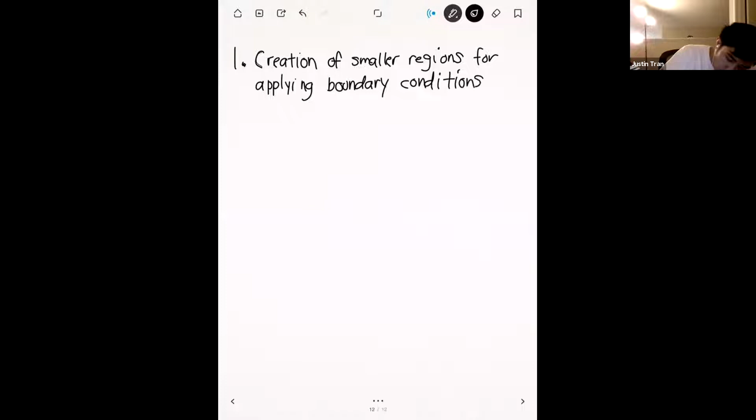Okay, so that's the first one. The second one that we're going to learn is how to split a model itself. I was asked this by someone who's doing the bearing housing one. One way you can approach this is to take advantage of the symmetry in the system, cut the model down the middle, take out one side, and then just focus on the other side.

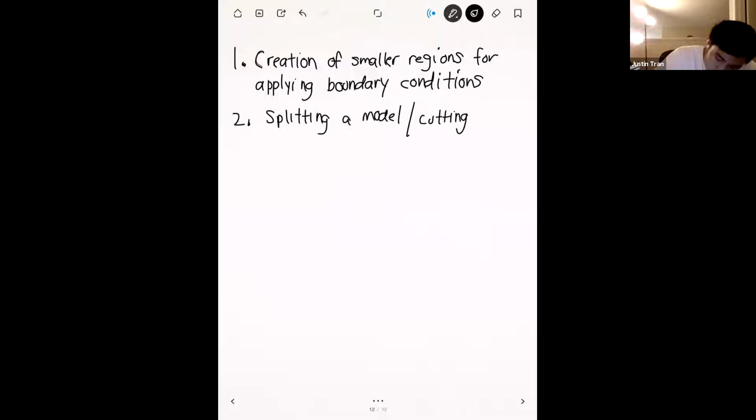And the third feature that we're going to go over today is how to do section planes within ANSYS Mechanical.

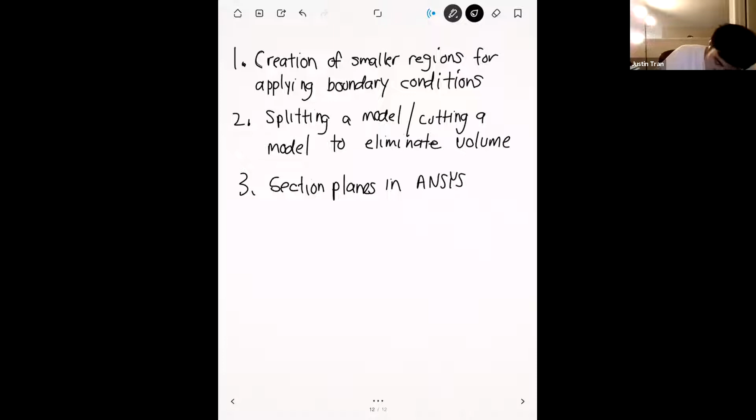So in case you're doing something like the globe valve, and you want to look on the interior of the model, you want to do this with the section cut, so you basically want to make a cut just so that you can view it on the inside. There's a very quick and easy way that you can do that within ANSYS as well.

Okay, with that, let me go ahead and share my laptop screen. I'm going to do all of these with the globe valve, just because that's the one I was kind of playing around with. But you can of course do this for any other geometry as well.

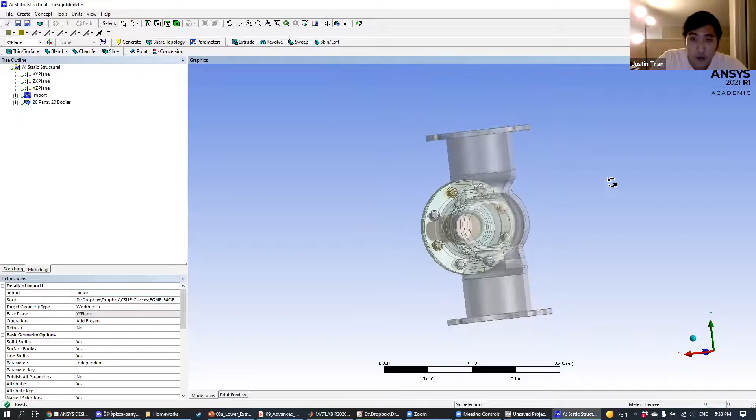The first thing we're going to do is point number one, which is the creation of a smaller surface for applying forces. The situation is kind of like this.

Let's say that you have this surface right here - actually, maybe this one is probably easier. When you click on the surface, you select the entire cylindrical part at the same time. For a lot of cases, that's fine. But let's say you want to model a case where you have some kind of impact that hits it from the outside, and you want to apply the boundary condition in a tiny area like this, and not affect the entire rest of the model.

The way that you have to do that is you basically have to create another sketch to define that region, and then you're going to project that region onto the model. Let me see - okay, that's a little better, just so now the whole thing isn't transparent. And so you have to do this in a few different steps.

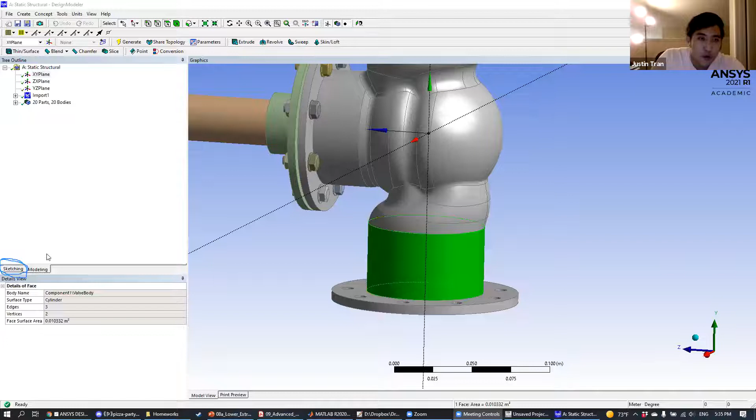The first thing you have to do is draw your sketch on the plane that you want. There's a few ways you can do this. One way is you can simply click on the surface, and then click on sketching down here. By highlighting the surface and clicking sketching, ANSYS is going to create a sketching plane for you that's tangent to this surface. So if you can see from here, after I click sketching, it created a new sketching plane that's tangent to this surface.

If you go back into modeling here, you can see we have plane number 4, and this plane number 4 is coincident onto the surface right here. So that's one way you can create a sketching plane - simply click on the surface of interest and then click on sketching.

But if you want to be a little bit more precise in terms of what plane you want, then you can go ahead and create another plane. If you go to create right here, you can click on new plane, and you can see we've created a new plane right here.

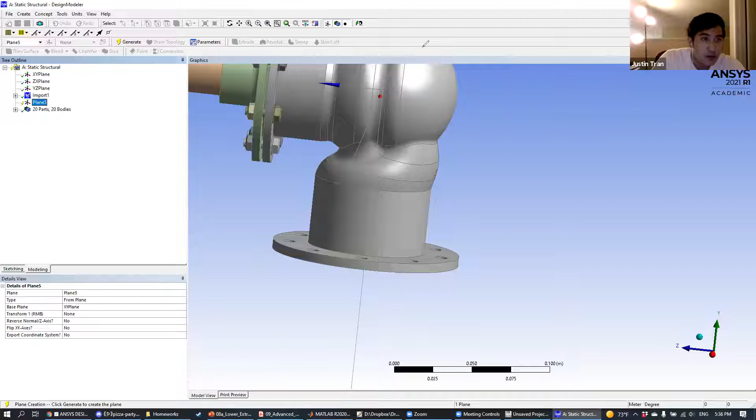From this new plane, you can define the direction for the plane. One way you can do this is say that this plane is going to be parallel to one of the base planes here. Just for the sake of this tutorial, we're going to make a plane that's parallel to the YZ plane. So I'm going to highlight the YZ plane right here and then click apply, and now this new plane is going to be parallel to that one.

Right now it's actually exactly the same as the YZ plane. But let's say that we want to offset it by a certain amount. What you can do is go to transform 1 right here. Transform 1 is going to let you either move the plane around or rotate it. Let's say that we want to offset it in the X direction. This is going to let us offset the plane in the X direction by an amount

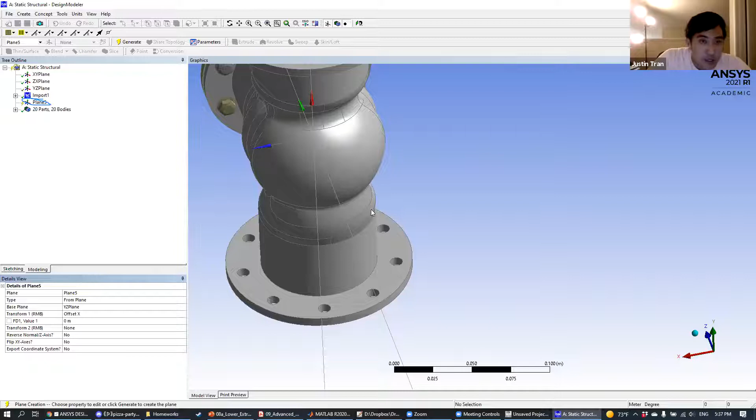that we specify. Let's say we want to offset this by 0.05 meters. Oh, I'm sorry, the X direction is that way. So actually, we want to offset this in Z. It's a little bit confusing because the planes have their own coordinate system here, which is different than the global coordinate system. So you kind of have to look at the colors of the arrows.

In this particular case, I want to move the plane out of plane up over here, so that we can get it onto the surface of the cylindrical part. So I'm going to offset it in Z instead. You can see that now this plane is no longer at the center of this part. It's now offset to the side. If we want to get this closer, we can do 0.04, and you can see now that we're closer onto the surface.

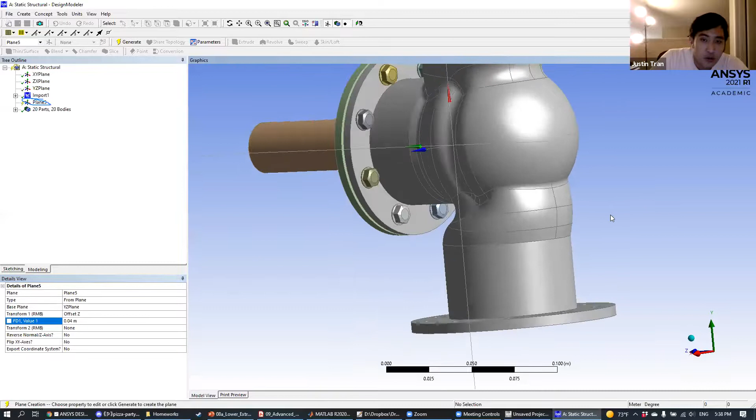Your new plane doesn't have to be touching the surface itself, although it makes your projection look a little bit cleaner, so the closer you can get to the surface, the better. But just to illustrate that you don't have to have this plane perfectly connected to the surface, I'm going to leave this plane a little bit offset. Can you see from your computer screens how this plane right here is offset from this one?

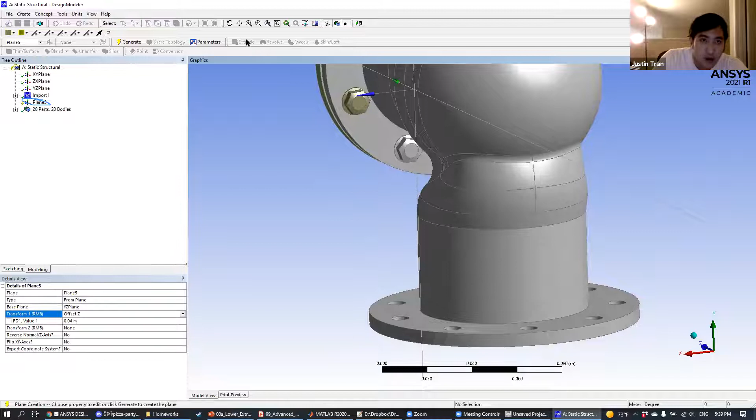Here's the centroid of this plane, and I want to project a little circle onto this surface right here. You can see that the plane I created was a little bit offset from that. Now that we've created this new plane, let's go ahead and sketch in it. You're going to go to the tree outline, click on the new plane that you just created, and then click on sketch.

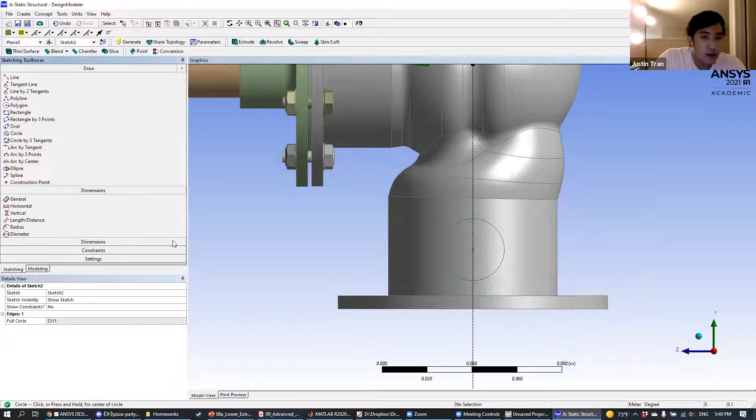Now we can go ahead and create a sketch here. Let me center this up so I'm looking right at the plane. I'm going to draw a circle on here, just like this. Then we can go ahead and dimension this circle. Let's say that we want a diameter of 0.025 meters. Then let's offset it from the bottom here, so let's do one more dimension, and we'll do vertical.

Oops. Let's do the vertical dimension with this plane right here. Oh, sorry. Is this horizontal? Okay, it's horizontal. Let's say that we want this to be 0.008. So our circle has moved up a little bit. Of course, you can move this around as much as you need to, depending on where you want to apply the force. In this case, I want to apply a force striking on the outside right there with an area that looks like that.

So this is our location that we want to define. The next step is to project this sketch onto the target surface, but we have to do that in a few different steps. The first thing we have to do is transform this sketch into a solid, because ANSYS doesn't really do anything with sketches, so you need to turn it into a solid for it to do anything. So we're going to do an extrude. With sketch 2 highlighted, we click on extrude up here.

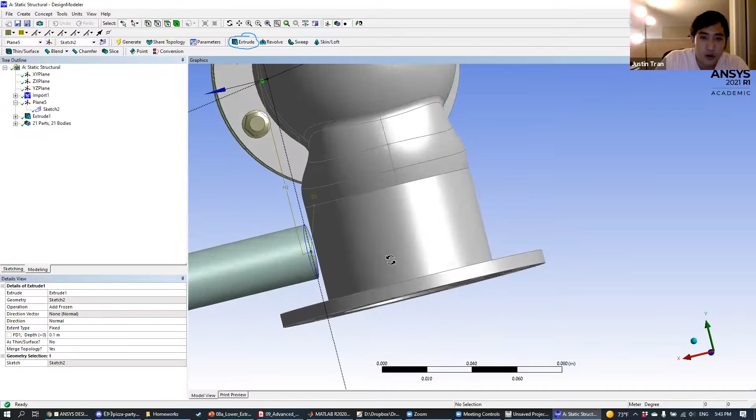So we go ahead and generate this. To do that, you should go to tools right here, and you're going to go to projection. This is going to project whatever sketch that you have onto a surface. The way that you use this is you first define the edge of the sketch that you want to project. So I'm going to click on the circle that I just created, and I'm going to hit OK.

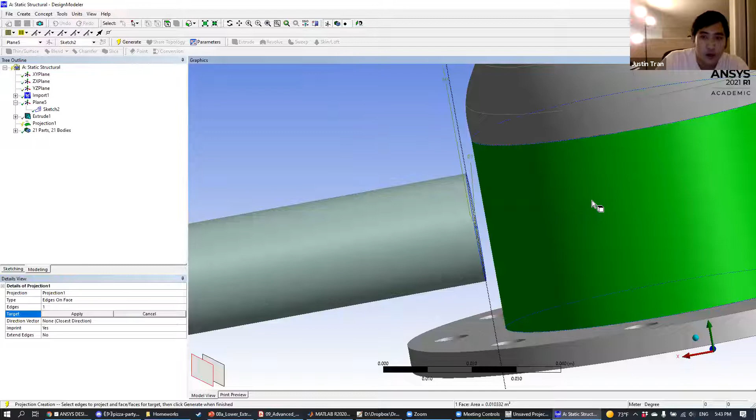Now our edges are defined, and next we're going to define our solid, or the target for this. So we're going to click on target right here, click on this cylinder part right here, hit apply, and then from there, we're just going to hit generate. What it's doing right now is ANSYS is taking that circular sketch and projecting it onto the surface.

It's a little bit hard to see from here, but you can see that now when I click on this surface right here, the part that we just projected onto it is no longer selected. And then we can select that part now as something different. So now we've basically designated this area right here for us to apply a boundary condition.

The last thing you're going to want to do is, because this cylinder right here is kind of a nuisance, we don't actually want this to be part of the model. It's served its purpose, it's allowed us to perform this projection, so we can just suppress this cylinder now. If you just created the new surface within ANSYS, it's going to be created as a solid right here. So you're going to right-click solid, and you're just going to suppress it.

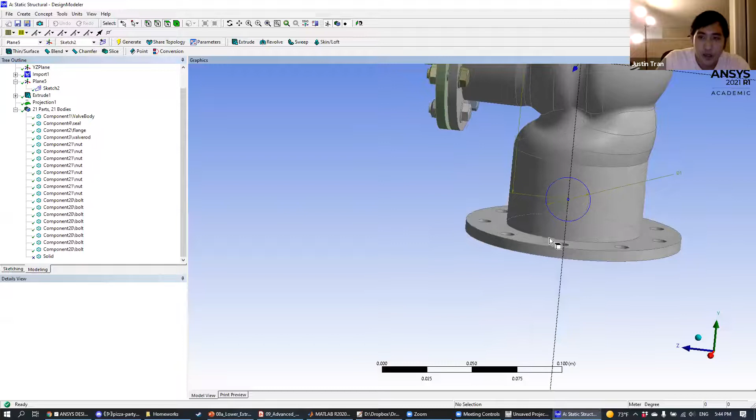And then all you're left with now is just your original geometry, but now you have a place that's cut out where you can apply a force. When you take this geometry into ANSYS Mechanical, it's going to remember this, and it's going to allow you to apply a boundary condition on this region right here. Any questions on this?

I do have a handout for it. I haven't uploaded it yet, but I will upload it after the class today. That handout goes over this exact process right here. And so that's projection. That's how you create another surface in your model for boundary condition application.

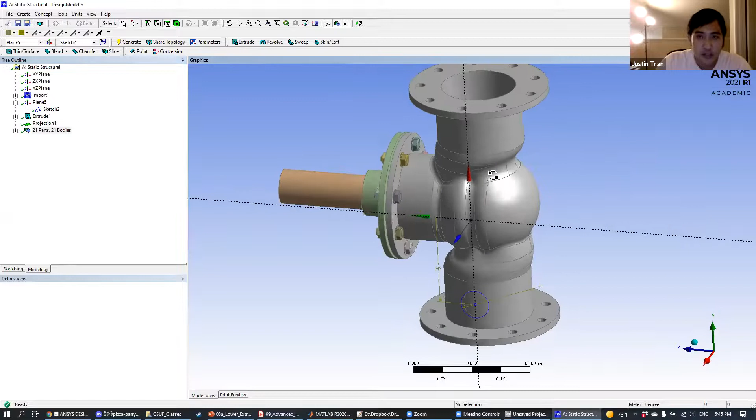The next feature I want to go over is, let's say that we want to split this model in half. Let's say that we've noticed that this entire globe right here is symmetrical across this direction. It's a little bit easier if I see it in this one. And so if I draw a line right here,

Imagine I drew that line a little bit better, a little bit centered. You can see that our geometry is symmetric above and below the line, right? And so what a few people have been asking me is, when you have symmetry like this, can you just perform the analysis on just one side of the model, and then just assume that you get the same results on the other side? And the answer is yes. And so you can actually do that.

But in order to do that, you have to actually split the model, cut the model in half. Okay. And so there's literally several different ways you can cut the model. But this is kind of the easiest way that I like, or at least the one that's most intuitive. Okay. And so what we're going to do is basically the same principle that we did last time, where we're going to split all the surfaces in half. And then all the parts that we split along the halfway line, we're just going to suppress them.

Okay. So the first thing you want to do is find a good cutting plane for your model. And so for this particular case, I want the YZ plane, because this is going to cut the model right in half in the way that I want. For this particular model, one of the default planes works really well. But if one of the default planes is not what you want in terms of splitting, you can create a new plane in the exact same way that we talked about earlier today.

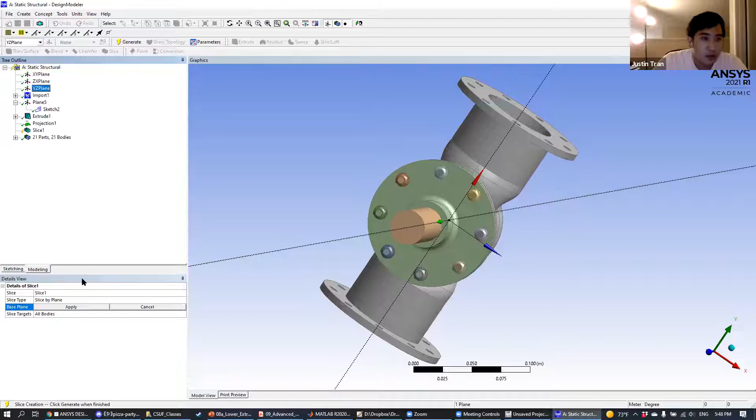Okay. So once we have this plane highlighted and we know we're going to split along the YZ plane, I'm going to go to Create, and then you're going to go to Slice. Under Slice, it's going to ask you to select a plane on which you want to slice against. Like we said before, we're going to slice along the YZ plane. And then your slice target is going to be all the bodies in this geometry. With the slice plane selected, we can go ahead and hit Generate.

Okay. And you can see now we have kind of like a Harvey Dent, two-face kind of thing going on with our model. Yeah.

Question: is there a reason I'm not using SpaceClaim, or is it just preference? Yeah. So all the YouTube videos I saw on this stuff use Design Modeler, and so I use Design Modeler for that. But also the projection thing that I just showed you, I actually do have a tutorial on that in Design Modeler, and so I thought I'd keep it consistent, because I'll post the handout for that after the class today. And also switching programs is kind of a pain, so that's why I kept everything in Design Modeler.

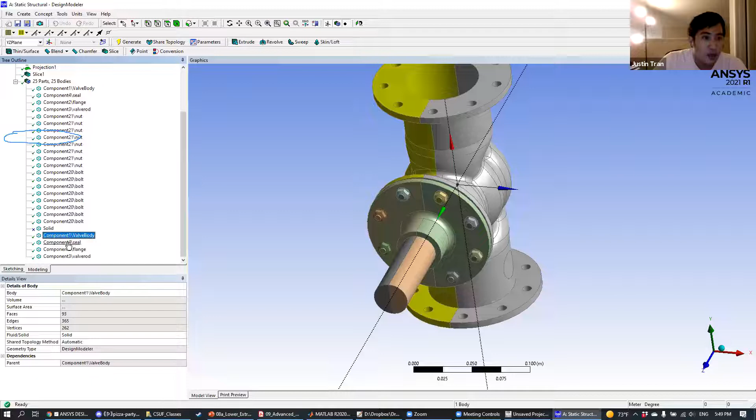Okay. And so now that we've two-faced our geometry here, you can see that one side of the geometry is distinct from the other one. And if you open up the parts list, go to the tree outline here and open up this part right here, 25 parts and 25 bodies. If you noticed, earlier in the lecture today this only said 20 parts and 20 bodies. We have one extra body from the frozen surface that we created, but that's not important anymore. But we've also created these new ones right here, which are the result of our split.

And so if we want to get rid of this part of the model, all we have to do is just right-click this and then suppress it. And this thing too, I don't even know where this is. This is this thing right here.

Okay, so we can right click this, suppress it, right click this thing, suppress, right click this thing and suppress. And of course, for the globe valve here, we have all these nuts and bolts. And so you're going to have to find out what those nuts and bolts are and suppress them too. So let's see, that one, not that one, that one, not that one, that one, that one, that one. And also this one, and then probably the last three.

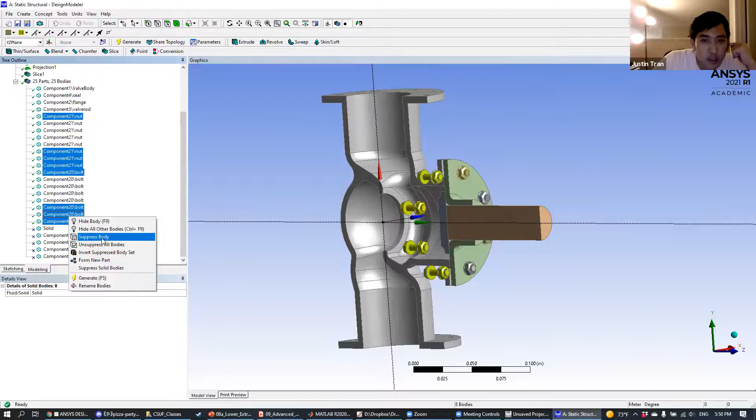Right. And so these nuts are no longer desired, so we can go ahead and suppress these as well. And we've successfully cut our model in half. And so what you can do now is bring this into ANSYS and do your analysis on just one side of the model and not have to worry about the other side.

And then, in order to actually perform a symmetry condition, you actually have to apply a symmetry boundary condition on here, which I'll show you in just a second. But to show that, I have to jump out of DesignModeler and into Mechanical. So, are there any final questions on this before I jump into Mechanical?

Professor, if you just forget to put that symmetry condition on there, will the calculations come out completely wrong? Yeah, or it has a strong potential to, because the whole idea with symmetry is that there's a whole other part of the model here. And so the symmetry condition is going to make it so that you don't have any deformation into the symmetry plane, right?

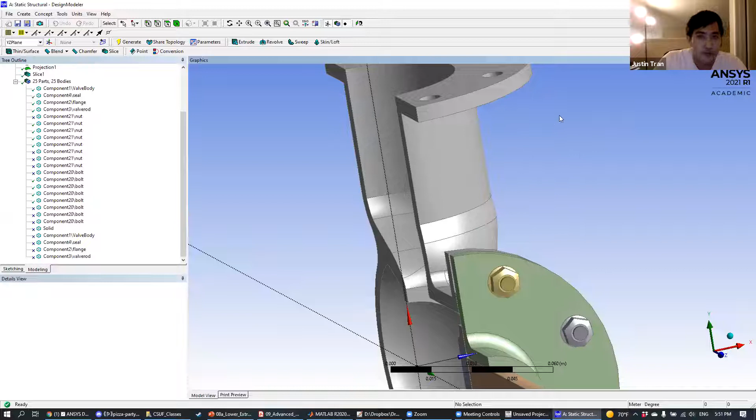Because if this edge right here or this surface deforms into the symmetry plane, then you no longer have symmetry, because you can't have that happen in the real part. And so the symmetry condition is basically going to make sure that you don't have any deformation or rotation into this plane. Okay. All right.

So let's go ahead and close out of this and open up Mechanical. Oops. That's the YouTube video I was watching.

All right. And then once we're in Mechanical, I can show off the last feature, which is section planes. But section planes is actually the easiest one to see. All right, so here is our model. You can see here we have our little bullet hole that we created before, and so we can now apply a loading right there. That's going to be independent of everything else. And then we also have our slice plane right here too.

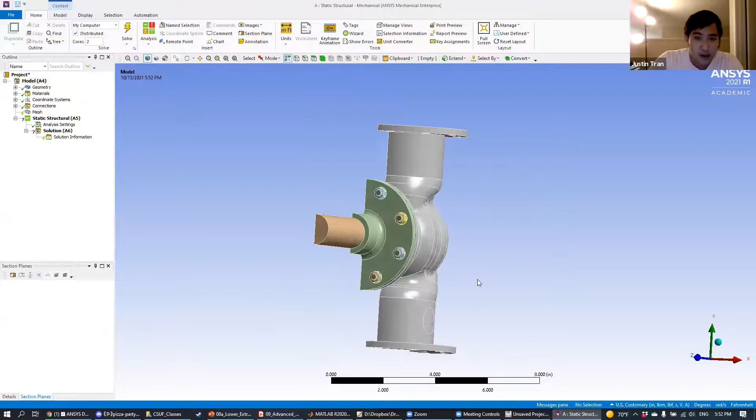Oh, one thing I should mention. Be careful if you're going to use symmetry in your model. You have to be careful in cases like this, right? Because remember, with symmetry, we're assuming that the other side of the model is exactly the same as what's here. So if we apply a force right here, then what's implicitly assumed is that we're applying another force on the other side of the model that we're not showing.

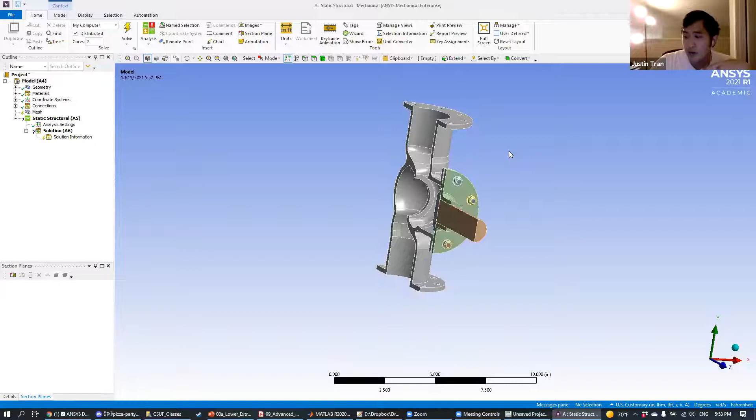So be careful combining these things, because with symmetry, you assume that everything is basically an exact mirror, so the geometry and the boundary conditions are mirrored as well. I didn't plan on covering symmetry just yet; I actually have it as part of lecture notes for later in the semester. But I know a lot of people have requested it, and for this project it'll help save a lot of cost as well. So I think it's definitely a good idea for this project.

Okay, so symmetry conditions. In order for symmetry to work out, basically everywhere that we've cut for the symmetry cut, we have to apply a boundary condition there. So we're going to right click and insert here. And then let's see, symmetry. Oh, it's not here. So if you don't see a symmetry boundary condition, maybe it's just not in the student version. You can kind of create the symmetry boundary condition yourself.

So you're going to go to, oh, I think this is it right here. Yep. So what you're going to do is apply a frictionless support. And the frictionless support is going to be on all the faces.

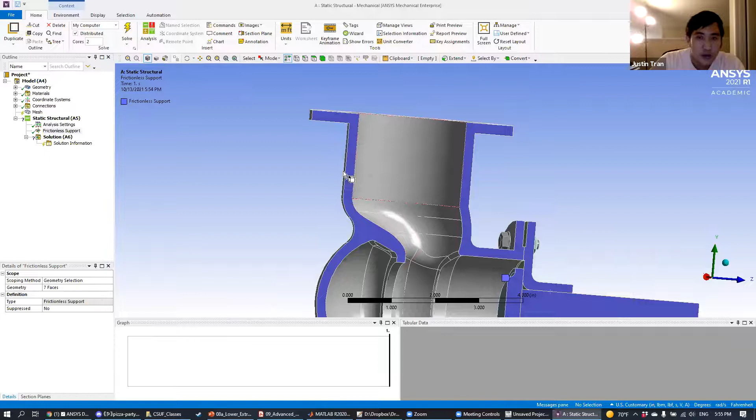This is going to prevent any kind of motion that's going into the plane, so you want to allow motion that's in plane. You basically want to allow the pipe to expand out this way—that's fine. But what you don't want is the deformation of the pipe to go into the plane. If you read the description for frictionless support, it says it inserts a frictionless face support to prevent one or more flat or curved surfaces from moving or deforming in the normal direction. The normal direction here would be outwards, either out of the plane or into the plane, and the frictionless support will prevent that from happening.

Another way that you can do this is you can simply just apply a displacement support. With displacement support, you're going to basically prevent any displacement into that plane, but you're going to leave the other two dimensions free.

Question: does this apply to the housing as well? Like, would we need to add a support where we cut the shaft in half? Yes, absolutely. Anytime you make a symmetry cut, you have to apply this constraint, because you're basically cutting the model in half, and you want to make sure that you don't get any deformation or rotation into that plane. The frictionless support should do that because it's going to prevent any kind of motion into that plane. But the other way you can do it is just apply a displacement support.

I know that maybe they took it out, but it's been a while since I've seen it—in previous versions of ANSYS they actually had a symmetry boundary condition you could apply. It looks like they don't have it for this version, so probably they don't have it for your version too. If you don't see it, you can just do a frictionless support, and that's the same thing.

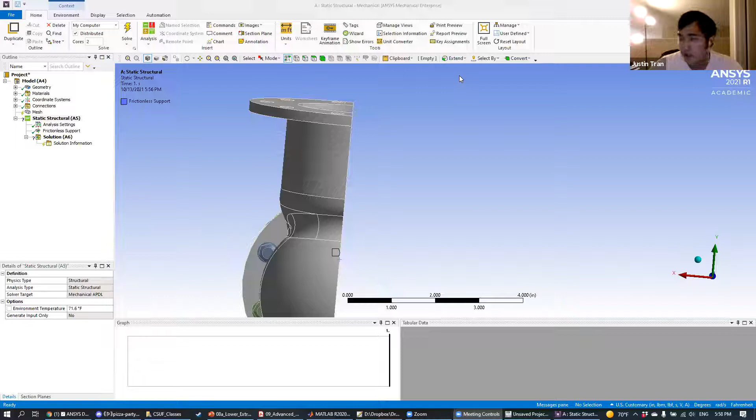The last thing I want to show you is how to create a section plane. For here there's kind of no point because we've already sliced the model, and I don't want to reset it—maybe we can bring stuff back, or maybe not, maybe it's gone forever. But let's say you have this entire tube surface and you want to look on the inside. On Monday we went over a technique called hide faces, where you can hide the outer surfaces of the model so you can apply boundary conditions on the inside. But I want to show you a section plane, which is kind of like a temporary cut within the model, where you can see what's going on inside.

You can do that from mechanical. The place that you're going to go is home, and then you're going to go to section plane right here.

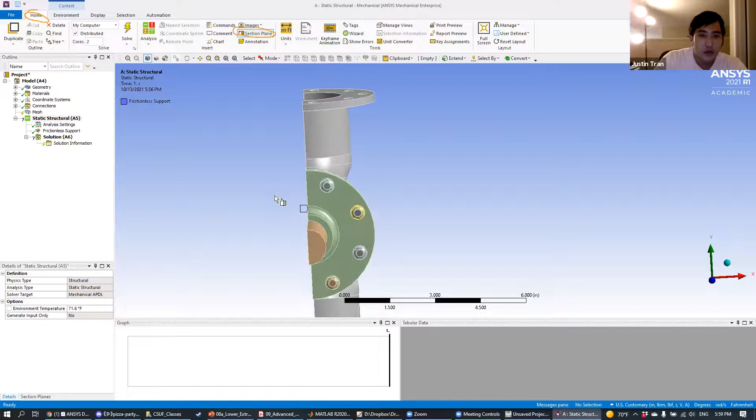Okay, so you're going to click on section plane. Your cursor is going to change to this icon right here - you can see it's a mouse with kind of a half shaded box on each side. From here, all you have to do is take your mouse and just make like Fruit Ninja and slice the model in half, and then there is your section plane.

If you want to modify the section plane, let's say you're not happy with this cut, you can go down to the bottom left of the screen. You can see here that we have two options for details and section planes, and we're going to switch over to section planes right here. You can see the section plane that I just created, and if you click on this section plane, you can click on edit.

After you click edit, you can see that we have this little bar that shows up in the model now. You can use this bar to modify the section plane as you want. One thing you can do is click on the box right here and move the section plane up and down, so you can modify the region on which you're performing your section cut.

Same thing with this line right here - if you want to view the other side of the model, you can click on this dotted line, and the dotted line will have you switch between the two parts of the model that you're creating a section for.

So if you want to create a section plane on your model just to see the interior of a certain part, you can do this for the results too. If you want to look at a section plane after you've run your simulation and see what the stress is like on an interior cut, you can do that from the section plane right here.

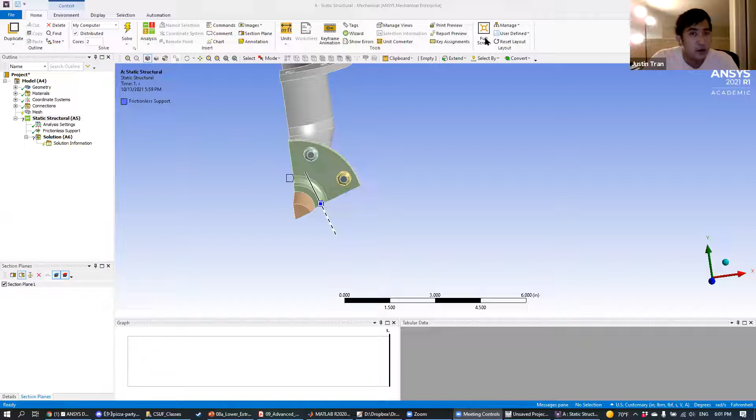Question: is there a way to make a section cut parallel to a plane? Yes, I think there is. Let me see here.

Yeah, I think there is, but I didn't get that far in the tutorial, and I had other stuff to do today. But there is a way to basically bring up some more advanced settings for this section plane, and you can actually define how the plane is defined in terms of different planes - whether you want to be parallel to one of the principal planes, or if you want to modify the normal vector or the angle directly. I did see that was part of it, but I just didn't get to that part of the tutorial. This will at least help you get started, and then you can find that feature if you look it up online yourself. I know it's there, I just didn't get to it.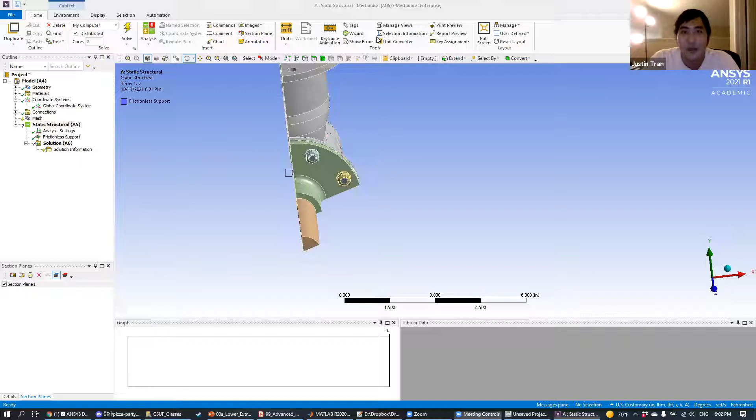Okay, let me go ahead and bring it back here.

All right, let's get back to talking about meshing again.

This set of lecture notes on advanced meshing is kind of like all the rest of the important information you should know about meshes, for you to use them in ANSYS. I think where we left off was talking about specific meshing controls within ANSYS itself.

Last time we talked about how does the hex dominant method work? Hex dominant is a method that I think everyone's been using quite a bit throughout the different activities. Remember, the goal for a hex dominant mesh is to create as many hexahedral elements in your mesh as possible.

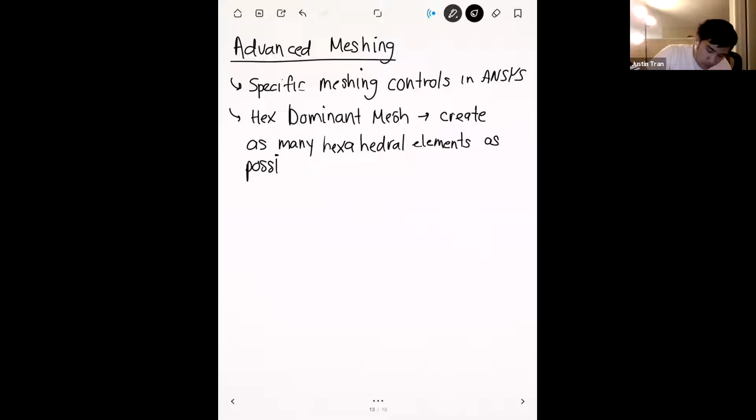Okay, and the way it did this was it first created a mesh. So what ANSYS is going to do first is create a mesh of only tetrahedrals and triangles. Then once it does that, it's going to merge together neighboring tetrahedrals and neighboring triangles to form hexahedrals and quadrilaterals.

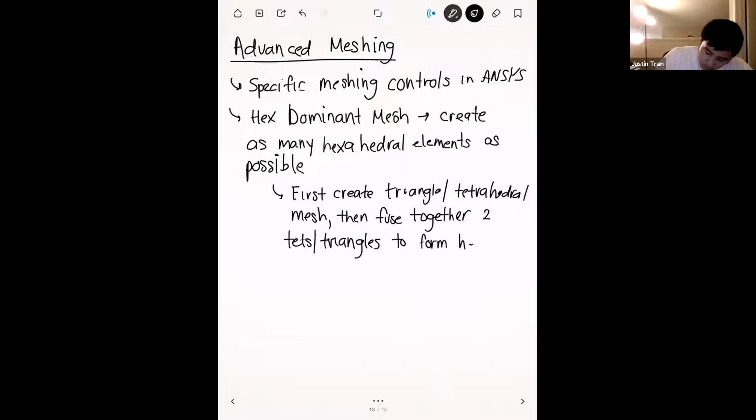At least in the very first stage of this meshing method, you're guaranteed to get a mesh, right? Remember, whenever you create a tetrahedral mesh or a triangular mesh, you're always guaranteed to get a mesh out of that. But when ANSYS goes towards the fusing phase, that's when things can usually get messed up. If the tetrahedrals are created in such a way that they can't reasonably be fused to create a nice looking element, that's when things get tricky.

Ideally, it should look something like this. I'm going to draw the 2D version because it's a little bit easier. Ideally, you should have something like this, where you have your triangular elements, and then when you fuse them together, you can basically just remove some edges here. And then here is your quadrilateral mesh. So this is something that was successfully fused.

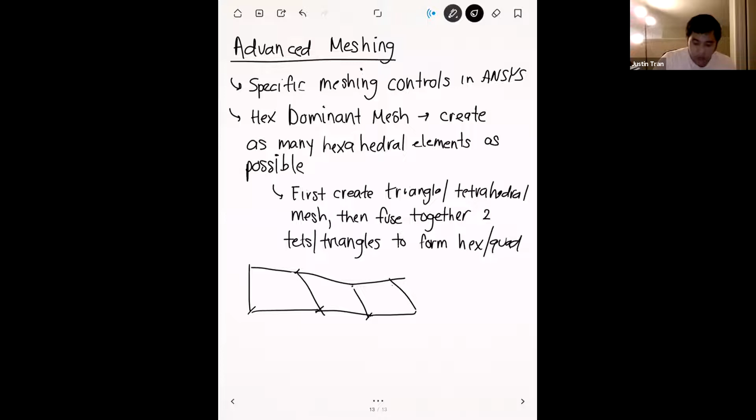Unfortunately, you might get situations like this where your triangular or tetrahedral mesh is really, really skewed.

Let's say we have a situation like this, where we have two triangular elements that are right next to each other. If we try to remove this edge right here, because that's the edge bordering between two different triangles, and try to form a quadrilateral from this, you can see that this quadrilateral is pretty scuffed, not the best looking quadrilateral. In fact, because these two edges are parallel the way I drew this, we actually end up with a triangle again.

In cases where you get a very skewed triangular mesh or a very skewed tetrahedral mesh for your particular geometry, those are situations where your hex dominant method is going to fail, because it's going to try to fuse elements like these together, and create a really wonky element which has skewness of who knows what. So when the hex dominant method fails in ANSYS, probably something like this is happening, where it was able to create a triangular or tetrahedral mesh, but performing the fusion here was not successful.

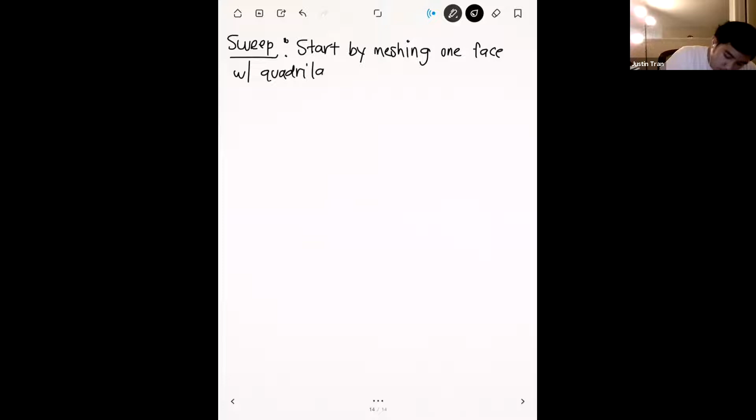The next method for creating a hexahedral mesh is called the sweep method. You might have seen the sweep setting when modifying your meshing settings in ANSYS. The idea with the sweep setting is that you start by meshing one face in your model with quadrilaterals. Ideally, it should be a face that's relatively easy to mesh with quadrilaterals. Then from there, you take that face and sweep it along the rest of the body, creating a hexahedral mesh along the way.

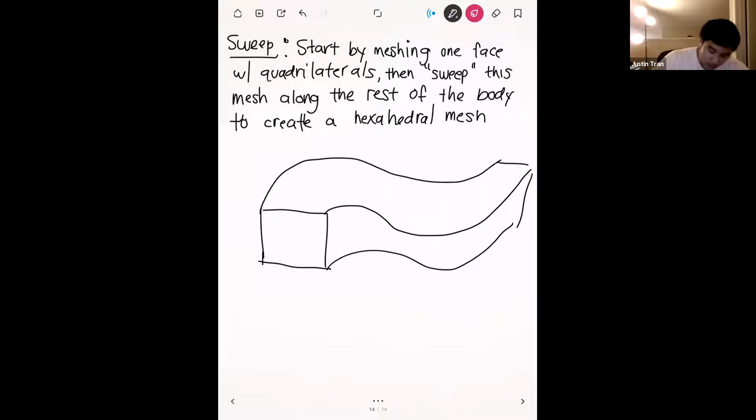The way it works is something like this. Let's say we have a square surface. Square surfaces are great for quadrilaterals because you can basically just put a waffle on this and get a quadrilateral mesh. Let's say the rest of the body looks something like this. Under the sweep method, let's say we've chosen this face in the front as our starting point. The first thing we're going to do is mesh this with quadrilaterals.

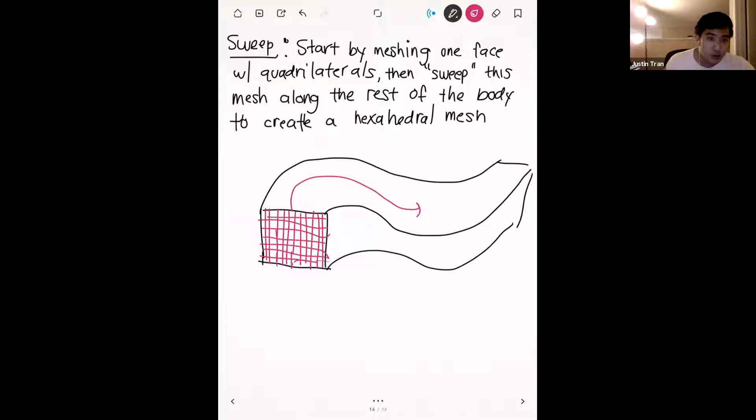This is something that you can manually change within your model itself. And all the faces that you're going to sweep towards are called your target faces. So remember, you're sweeping from the source to the target face. Any questions on this?

So Professor, a quick question. If we have a face like that, like in a real geometry that's mostly square and well modeled by quadrilaterals, if we choose that as the source face, is it going to produce a higher quality mesh on the target faces, or does that matter?

It does, yeah. Whatever you choose as your source face, think of that as your stencil. Basically, whatever quadrilateral mesh you get on that source face, it's going to try to propagate that through the rest of your model. So if you choose your source face to be something where you can get a good quadrilateral mesh on, that nice mesh is going to propagate through the rest of your model, and the rest of your mesh is going to look good as well. For geometries where you have a very nice source face and can see the sweeping happen really nicely, sweeps actually produce a pretty nice mesh compared to the other methods.

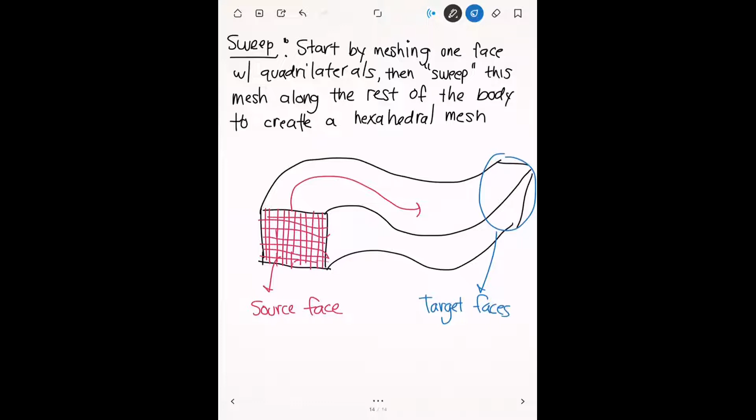All right, so that's sweeping. Sweeping works great for geometries where you can imagine this happening, but unfortunately a lot of geometries just aren't like that. If you think of the globe valve for your project, that's a model where it would be hard to find a good sweep surface. Even for the bearing housing too, I think a sweep would work really well for the shaft itself because you basically just have one shaft that goes throughout. But if you're trying to mesh the housings, that's definitely going to be difficult for the sweep method to do.

Another twist on the sweep method is that, instead of just having one source and multiple targets, there's a variation where you can have multiple different sources that sweep up into a certain amount. This is called the multi-zone method. Under the multi-zone method, it basically works on the same principle as the sweep, but instead of just having one source, you can have multiple different sources.

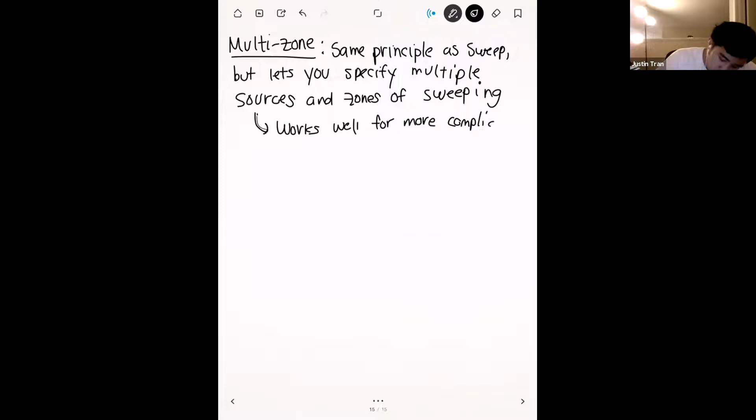This works really well for more complicated geometries. As a simple case, let's say we have a Texas-looking geometry, or I guess you can say this looks like a cactus.

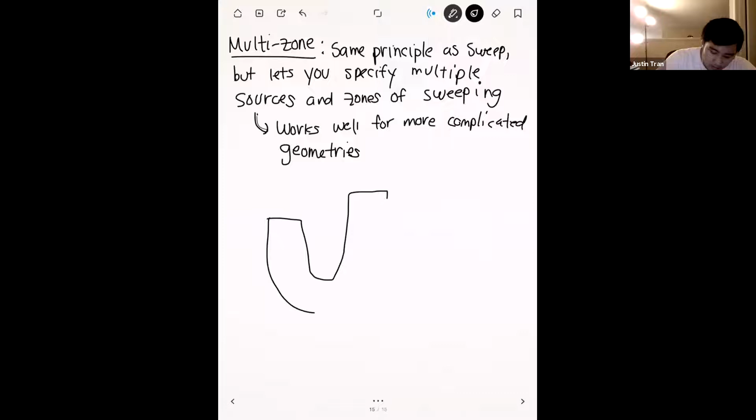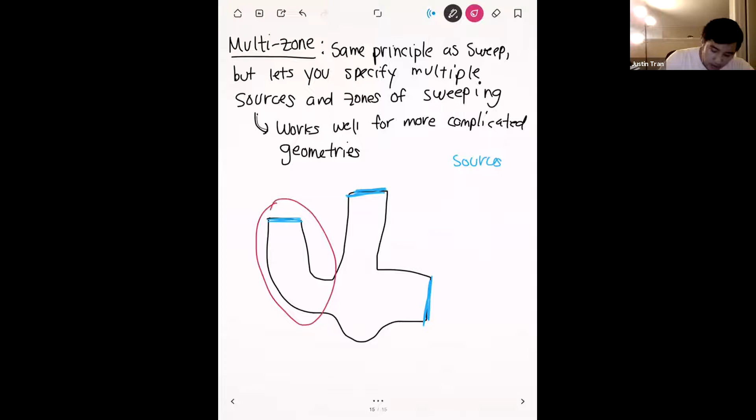Under the multi-zone method, you can say, okay, I have a strange geometry, although for this one, actually regular sweep can work really well too. But what you can say instead is, let's define these three surfaces right here — those will be our sources — and then let's have them sweep over only a certain range. Let's have the first surface sweep along that range, the second surface sweep along that range, and the third surface sweep along that range.

Under the multi-zone method, you have all the benefits of the sweep, but more degrees of freedom to modify the settings so that you can get a higher quality mesh. Any questions on this?

All right, so those are the settings available to you when you choose hexahedrals for the element shape. There are different methods, so if the hex dominant method doesn't work, you can try sweeping and see if that works for you. Let's talk about some of the options available to you for tetrahedral meshes.

And so again, these settings right here, I know several of you have come across them, and you've asked questions on it, and so I've kind of asked you guys to be patient about it so that we can discuss it together as a class. And here it is. Okay, and so two of the settings that you'll see in your tetrahedral meshing are patch conforming and patch independent. And so let's talk about what each of those settings mean.

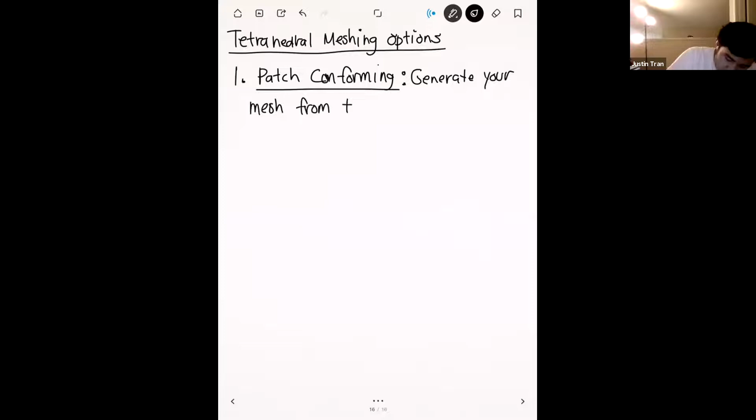All right, so let's start with patch conforming. You can kind of think of this as building your mesh from the outside going in. In other words, the first thing this method is going to mesh is all the exterior surfaces of the model.

And since we're doing a tetrahedral mesh, we're going to be meshing them with triangles. And so the good thing about this is that all of the exterior surfaces are going to be meshed perfectly. What that means is that all the geometrical features of your model will be perfectly represented.

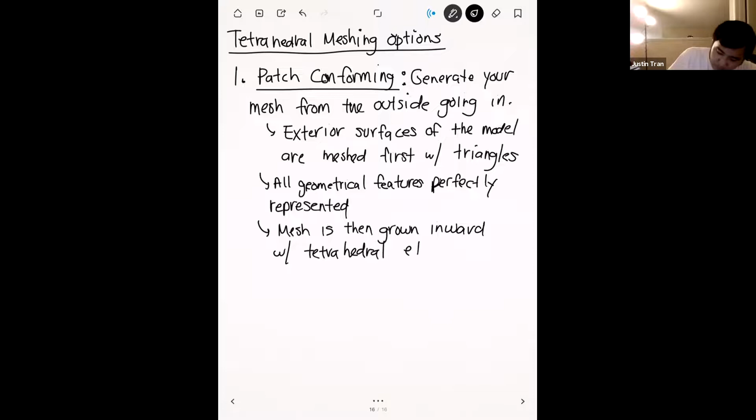All right. And so this patch conforming method, I believe it's the default. It should be the default. If diving into meshing theory a little bit, this is like the standard way to produce meshes. First thing you do is you mesh the exterior, you get a surface mesh, as they call it. And then from the surface mesh, that defines how your volume mesh is going to develop.

In a lot of the other research softwares that I've used, this is basically the only way to mesh stuff, because a lot of times you want to prioritize that you capture all the geometric features that you can. Okay, so that's how the patch conforming method works. So what's the downside? Because it's so strict on making sure that you represent the geometry exactly, you're very likely to create some distorted or skewed elements.

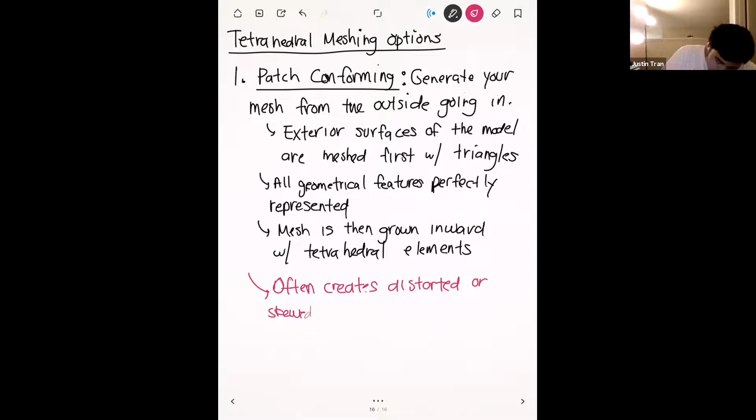Or maybe I shouldn't say it creates it often, but it's much more likely to create these distorted elements, because you're prioritizing the geometry so much. If your geometry is doing some weird things, it's going to try its best to fit the geometry, but it might have to produce a very strange element in order to do so. That's not to say it happens all the time, but it's much more likely to happen versus patch independent, which is the method we're going to go over next.

But for cases where you want to make absolutely sure that you respect every geometrical feature, patch conforming is the best way to do that. Any questions on this?

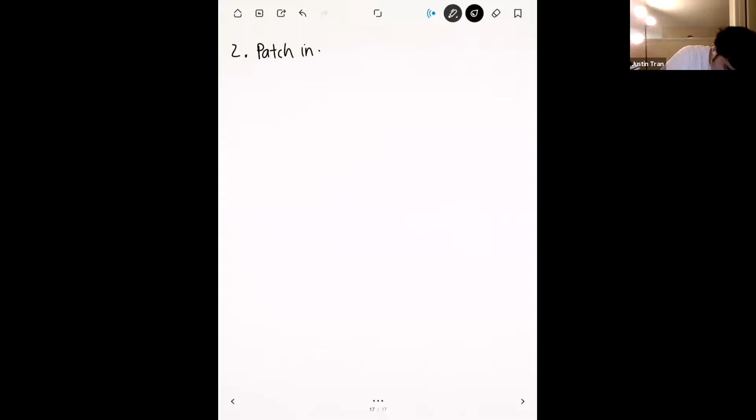Okay, so let's go over patch independent. Patch independent is the exact opposite process. Instead of starting your mesh from the outside and going in, patch independent is going to go from the inside and go out.

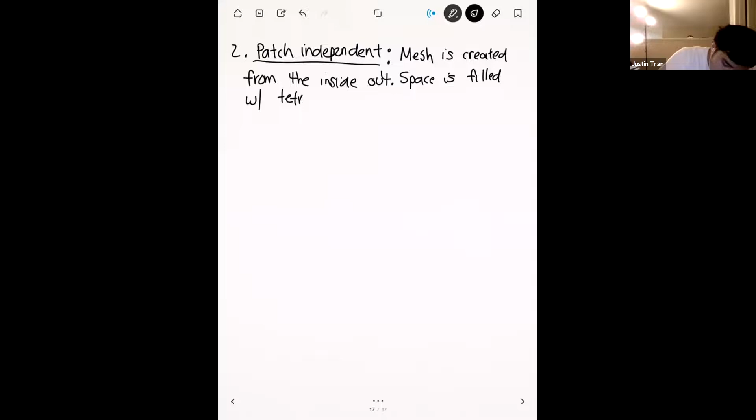Or in other words, the first thing that's created is going to be all the tetrahedrals on the inside. Okay, and so it's going to start with filling the space with tetrahedrals. Then those tetrahedrals are grown in a way such that they move towards the exterior of the surface. Right, and so this process keeps continuing until the tetrahedrals kind of go beyond the boundary of the geometry.

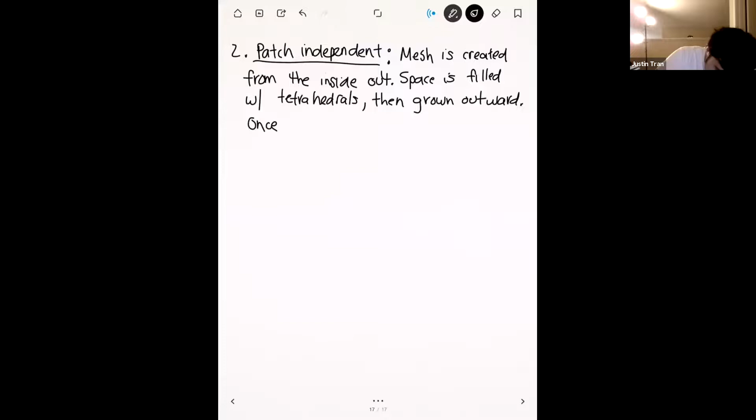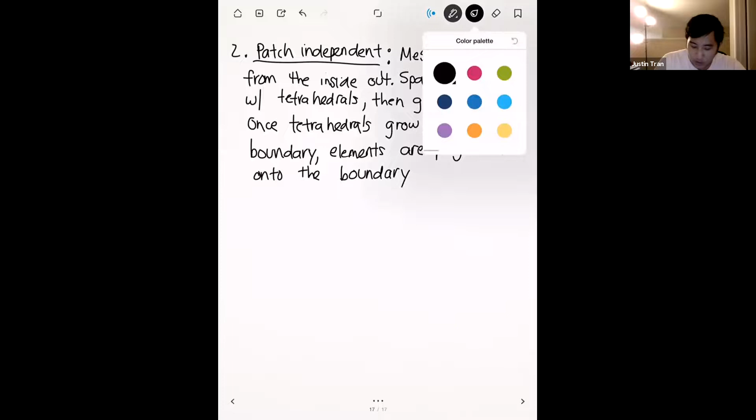Then once the tetrahedrals grow beyond the exterior boundary, what ANSYS will do is it'll project those tetrahedrals onto the exterior surface. All right. And so what does this do? What this will do is that this is going to optimize for the quality and the shape of your elements.

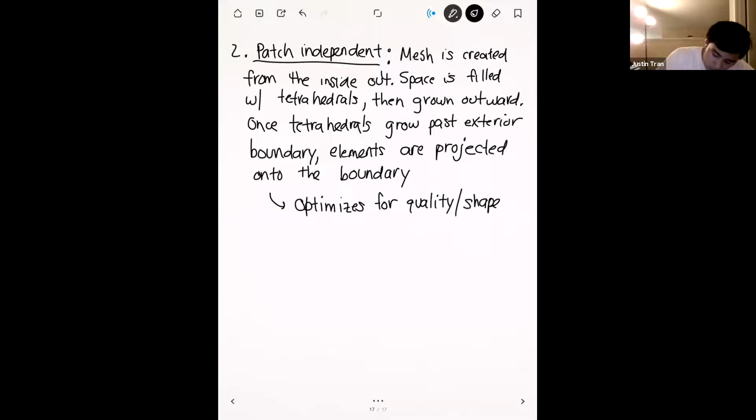And so for patch independent, because the tetrahedrals are created first, ANSYS is going to do its best to make sure that you have as many high quality elements as possible. And so this is great for situations where you're just getting really skewed elements and it's kind of screwing up your results. If you switch to a patch independent, then you're going to get a much higher quality mesh in general, at least in terms of the element shapes. And so that's a big plus.

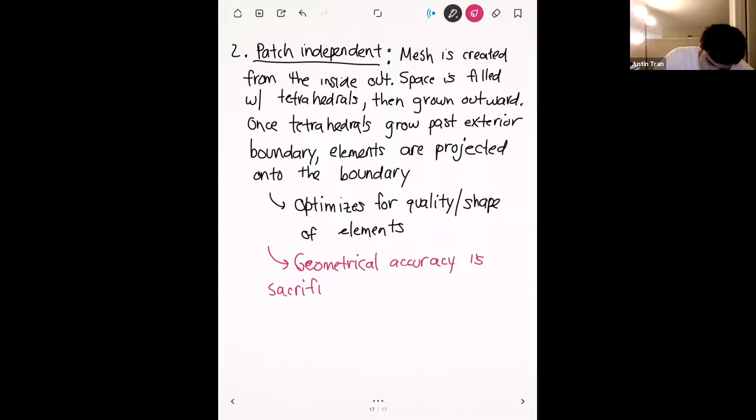The downside for this is that the faithfulness to the geometry kind of takes a back seat to the mesh quality. And so you might lose out on some geometrical features in your model because ANSYS is going to be focused a lot more on producing nice high quality elements. And so if you really care about all those geometrical features, and that's more important to you than the mesh quality, then make sure you use a patch conforming method versus patch independent.

But I will say that it might seem like a bad thing if you're losing geometrical features, but I'll argue that this is not always a bad thing. If ANSYS is going to automatically ignore some really fine features, what's likely is that those features probably weren't going to be that important anyway. Because a lot of the features that you end up missing from patch independent are going to be really tiny details on the surface, like little curvatures, little tiny surface features, or an imprint on the surface.

A lot of times, those tiny features are not going to add anything significant to the structure of whatever you're analyzing, because most of the stiffness or most of the strength is going to come from the interior, right? And so those small features, most of the time, are going to be aesthetic features. So if you ignore them or lose them, it's not that big a deal most of the time. But sometimes they are important.

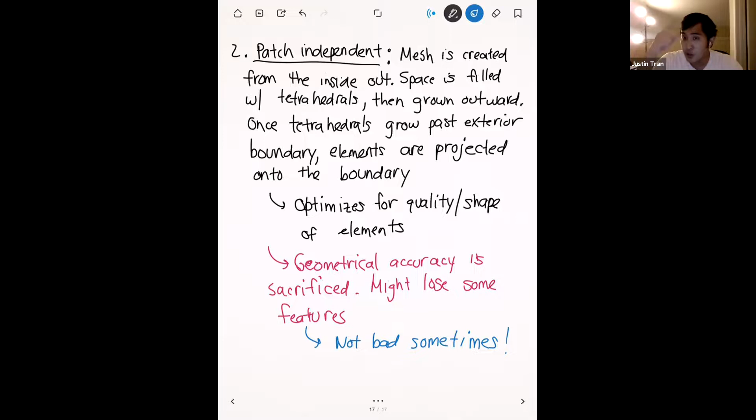So one example I can think of off the top of my head is tire treads. For tire treads, you have a lot of very fine features within the treads, but those treads make a big difference on the performance of the tires. So those are small features that you want to make sure you capture. If you do a finite element simulation of a tire and you're missing out on those small features, then your simulation is probably not going to be that reliable or that accurate.

And so at the end of the day, it's a judgment call. You have to think about your geometry and what's the most important thing for this simulation. Is it going to be more important to get perfect geometrical accuracy, perfect geometrical faithfulness, or is it going to be more important to get high quality elements just to make sure that the results that you get are reliable and they're converged?

Okay. Any questions on this stuff? Yeah, Professor. I have a question about this. So I know last time you talked about how we have all our metrics to determine if our mesh is high quality. Yep. Like the min and max skewness and then the mean skewness. Yep. So you're saying that this patch independent is going to be producing a high quality mesh, right?

Correct. So if we were to just look at our mesh metrics, we would probably see that they are better than a patch conforming method. Would I be right to say that? Yes. You're much more likely to do so. Okay. So let's just say we're going through our design process and we do our calculations with both, and our metrics are better for the patch independent method, but how would we know that the calculations are less accurate if it was to not correctly model some geometrical features because it's prioritizing the quality of the elements instead?

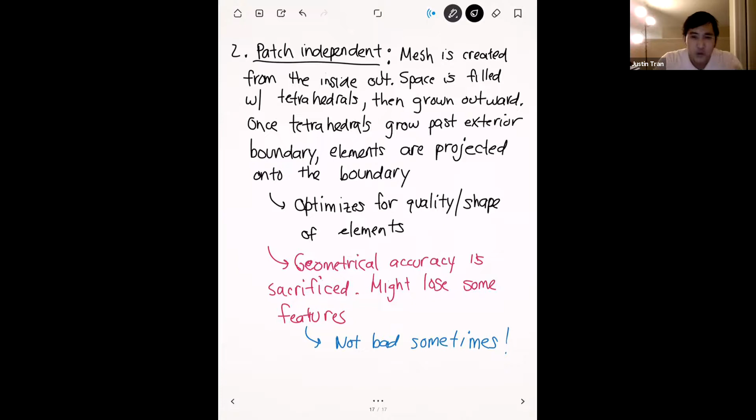Okay. And so the next thing I want to cover in terms of meshing is convergence behavior. Okay.

All right, and so we've already gone over all the different element types, all the different shapes that are available and all the different orders that are available, and we kind of talked about in general how some are better than others for certain situations, but we didn't really quantify. And so what I want to do in this section is do a lot of head-to-head comparisons between different element types, and show you just exactly how much better the convergence is for each one. Okay.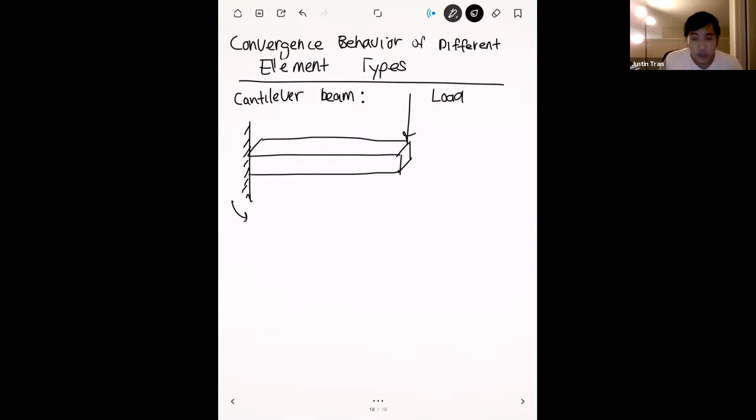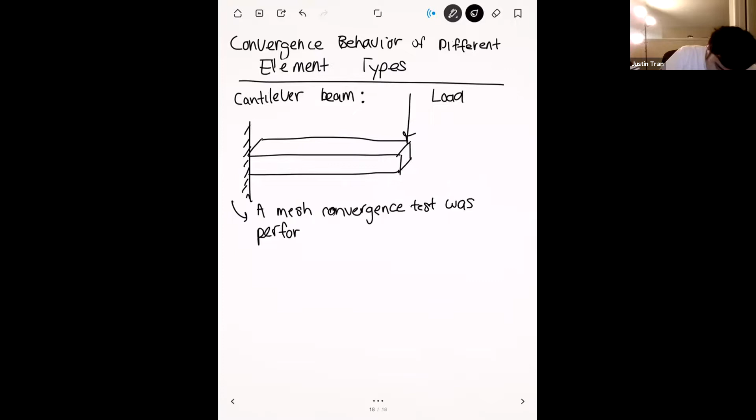Okay. And so for all the figures that I'm going to be showing you, they all did the same thing. They kept the boundary conditions the same. For each particular curve, they kept the element shape and order the same. But then for each one they performed a mesh convergence test. Okay. And the results from this are presented basically in pairs, so you're going to see pairs of the results of their mesh convergence tests. All right. And so the first thing we're going to compare is the linear tetrahedra versus the linear hexahedra.

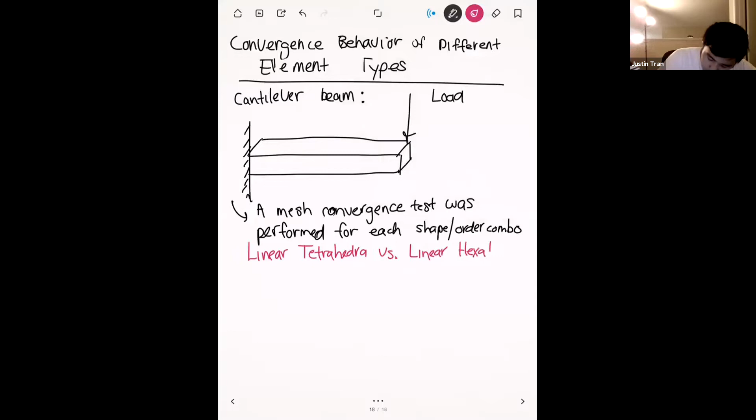All right. And so we've already talked about mesh convergence tests in activity 4, so I'm not going to go over the idea again. But remember, they're basically plots that look like this. On the x-axis, we have number of elements. And on the y-axis, we have the result for some quantity of interest. And for all of these cantilever beam simulations, the quantity that we're going to be looking at is the deflection of the tip.

You have to do this for activity 4? Yes, correct. Yes, you have to do this for activity 4.

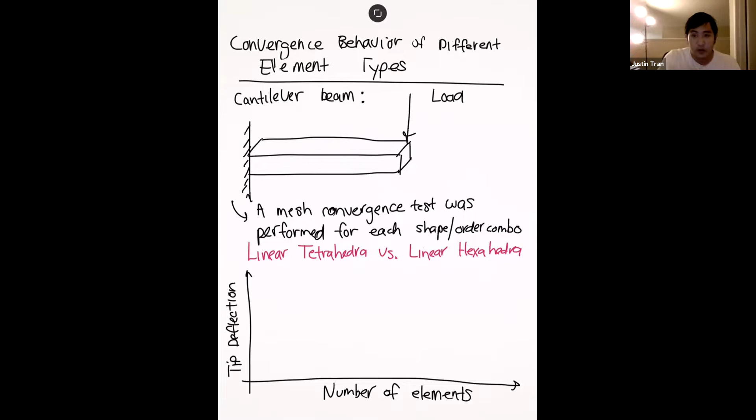Okay. And so, I should have done this in different colors actually. So let's say that the linear tetrahedra will be in red, and the linear hexahedra will be in blue. All right. And so for this particular simulation, the converged result, or I would say the true result for the tip deflection, is around 0.7. I think it's millimeters. And so the simulation will be considered converged once the deflection is computed to be 0.7. All right. So let's do the linear tetrahedra first.

And so the linear tetrahedra is kind of the worst element that you can pick for this. For a small number of elements, it dramatically underestimates the tip deflection. It's so bad that it actually starts at 0.3, so you can see that's less than half. And the convergence looks something like this. If we start here, the convergence kind of looks something like that. So even for a really high number of elements, it never really fully reaches the converged value. There's almost always a gap. And it takes so long to get there that the number of elements has to be something insane in order for you to reach convergence.

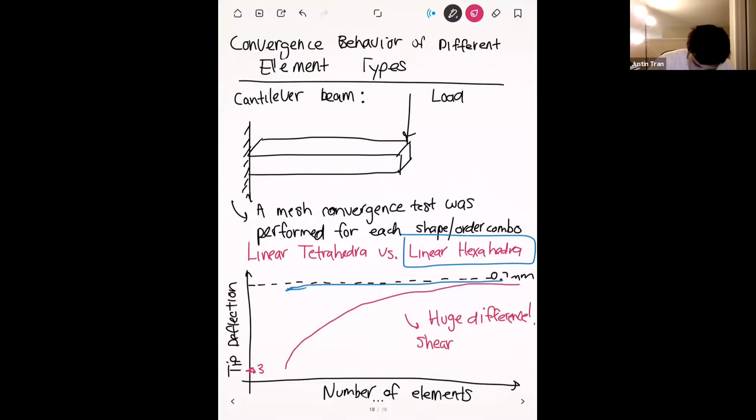You can kind of see that clearly in action here. For a very small number of elements, the linear tetrahedra elements are literally locking up on themselves, and it's just not able to deform nearly as much as it can. This is further evidence that if you're going to be doing a structural simulation, linear tetrahedra are just not the way to go.

Any questions on this?

So very quickly, let me go ahead and draw the graph for the quadratic tetrahedra versus the quadratic hex. Just like before, let's draw the tetrahedral in red and the hexahedral in blue.

Just like before, we have the converged value here. The converged value is actually 0.75 millimeters. This one is not that bad, honestly. This gives you faith that if you're doing a quadratic tetrahedra, you're actually in pretty good shape.

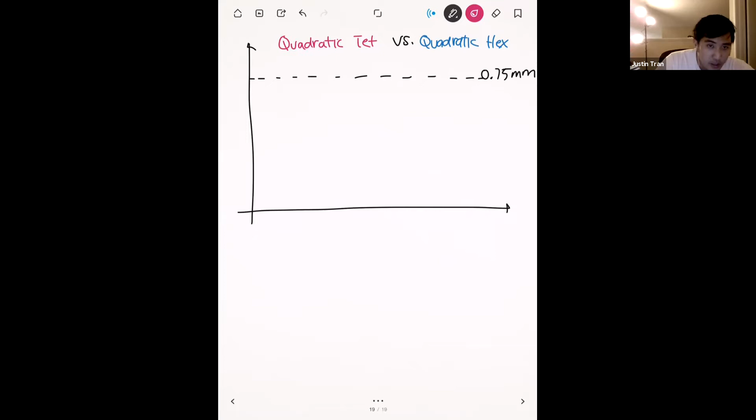The quadratic tetrahedra looks something like this. It might look bad, but actually the place where it's starting from is already really close. If you compare this to the starting point for the linear tetrahedra, that's starting out at 0.3, which is way, way off. But for the quadratic tet, we're not at the converged value exactly, but we're starting really, really close, at 0.74 millimeters, which is pretty much right there. And then eventually you do reach the converged value.

For the quadratic hex, of course, it's going to perform a little better, but not significantly so. You do get a little bit better behavior with the quadratic hex, but quadratic tets, like I've been saying, is totally fine, and you definitely get really good convergence behavior for that.

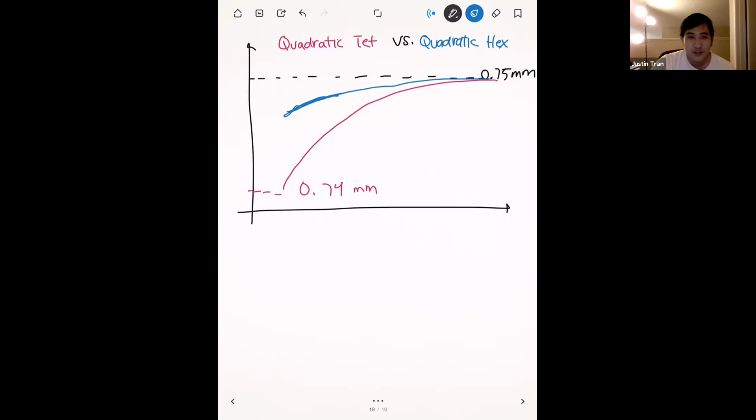Professor, I was just curious if you know how to use Patran. I do not, because I don't know what that is. Oh, it's a different finite element analysis software. Yeah, I can't say I've used it, but probably there's a lot of similarities in terms of how it's set up, or at least all finite element softwares follow the same process. It's just the buttons are somewhat different and they call things different. Yeah, that's what I'm having trouble with. That's always the hard thing about using a new software. Are there any online resources, like YouTube videos or online tutorials that walk you through that stuff? I haven't looked, I thought I would ask you first. Hopefully there's stuff nowadays, there's a lot of resources you can find online for that. Probably the audience may not be as big as ANSYS, or maybe it is, I don't know. I feel like every year there's a new software being used in industry that I've never heard of before, but millions of people use it apparently, so maybe it does have a big audience out there, and people post stuff about it online. Okay, I'll take a look then. Thank you.

Kamal, did you have any other questions? Oh no, sorry, I was just sitting around working on the activity. Okay, I'm going to close the call then. I'll see you next week. Have a good one. You too.